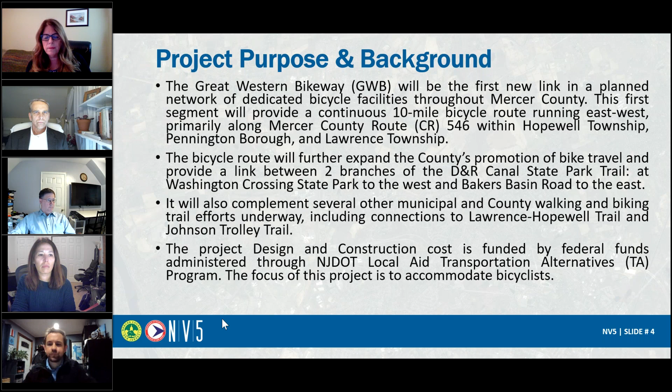Mike, if you go to the next slide. This next slide shows a little bit of what Matt Lawson was talking about. The original GWB project consisted of 3 segments, a total of 14.4 miles. Segment 1 is what we're focusing on now, down the middle, down 546, with a little bit of 631 and 632. So although the current project focuses on segment 1, that's really the main backbone of it.

Segment 2, shown there, is County Route 611, about 2.7 miles, which would connect the GWB along Scotch Road to recently installed bicycle facilities between Upper Ferry Road and Parkway Avenue in Ewing. Segment 3, at the top, is approximately 1.8 miles, and would connect the GWB to downtown Pennington. These segments 2 and 3 are anticipated to be constructed as roads are repaved, new land development occurs along the corridors, and/or more grant funding becomes available.

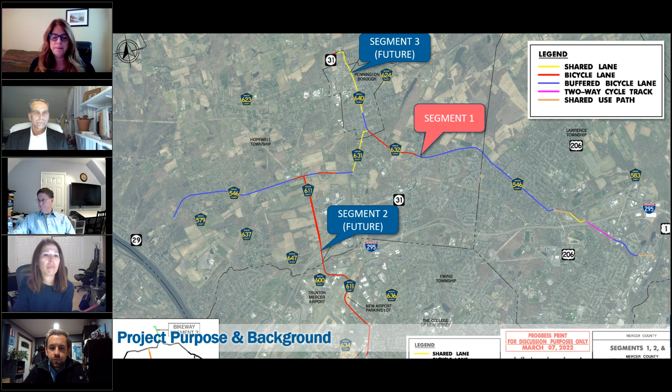So for the project limits, beginning in Hopewell Township, the project limits extend from the western terminus at the entrance of Washington Crossing State Park, along Washington Crossing Pennington Road to Ingleside Avenue. The route continues north along Ingleside Avenue, also known as County Route 631, into Pennington to South Main Street.

Heading southeast along South Main Street, also County Route 640 and County Route 632, it becomes Pennington Road and crosses into Hopewell Township. The route then continues into Pennington Lawrenceville Road. Proceeding east along Pennington Lawrenceville Road into Lawrence Township, the route continues to Mill Road. The route then follows Mill Road and links to Franklin Corner Road. Resuming east along Franklin Corner Road, the route then continues to Bakers Basin Road at US Route 1.

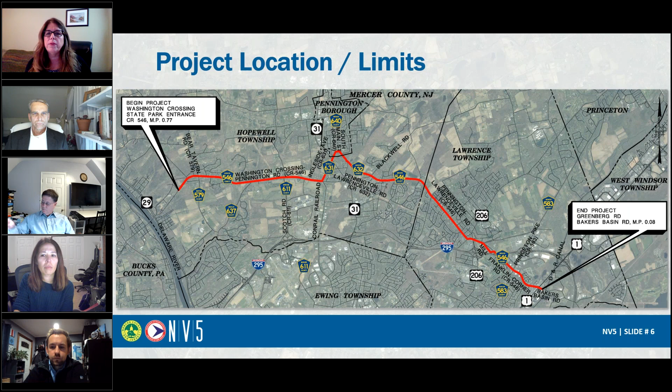Following Bakers Basin Road, the project limits terminate at Greenberg Road, where it will connect with a separate DOT project by the D&R Canal State Park—a replacement of the bridge over the D&R Canal. We're coordinating with DOT on that project to tie into it.

So the project location and limits, in addition to the D&R Canal State Park Trail, other trail links include the Johnson Trolley Trail crossing, Curlis Trail, 5 Mile Run Park Trail, 2 connections of the Lawrence Hopewell Trail, the recently constructed Keefe Road connection, and a future Bristol Myers Squibb connection.

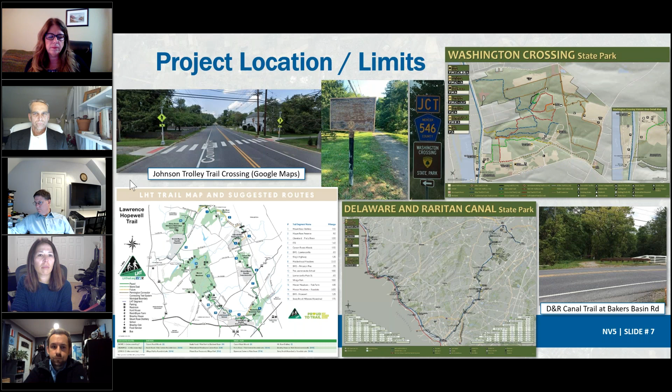So for existing conditions, you could see from these pictures and a little bit what Matt talked about in the beginning: Washington Crossing Road, which is 546, Ingleside Avenue, 631, South Main Street, 640, Pennington Lawrenceville Road, which is 632, County Route 546, and Franklin Corner Road, which is also County Route 546.

They're under county jurisdiction. Mill Road and Bakers Basin Road are under Lawrence Township jurisdiction. The majority of roadways consist of 2-lane sections, 1 lane in each direction, with varying shoulder widths, generally 7 to 8 feet, as Matt mentioned.

The left photo shows a section of Pennington-Lawrenceville Road where it does have these wide shoulders. The segment of Franklin Corner Road between Princeton Pike, which is County Route 583, and US 1 consists of a 2-lane section, 1 in each direction, with a continuous 2-way left median lane, shown on the bottom image on the right. Ingleside Avenue and Mill Road are narrow roads without shoulders. The photo on the right is of Ingleside Avenue, where the lane widths range between 13 and 15 feet.

So what we were trying to do is, within the existing curb-to-curb widths of the roadways, determine which is the best bicycle facility to fit to avoid impacts.

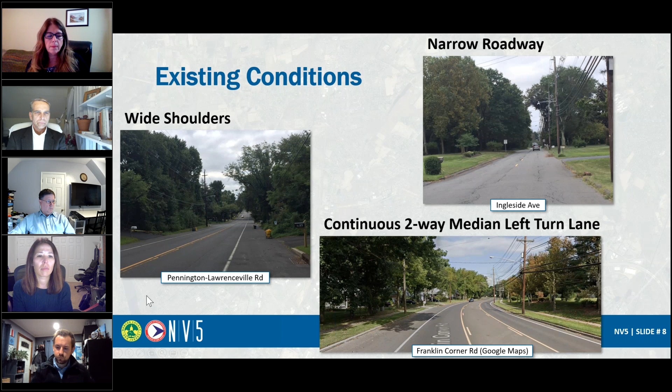So on this screen, you'll see a series of different sections. Most of the proposed improvements will be constructed within the existing roadway, to minimize impacts to existing drainage, utility poles, properties, and environmental impacts.

On-road bicycle lanes are proposed for the majority of the 10-mile bike route between Washington Crossing State Park and the D&R Canal State Park Trail at Bakers Basin Road. In several locations where exclusive bicycle lanes cannot be provided due to lack of available width, the bicycle facility will continue with either shared lanes or an off-road shared use path.

So the project basically consists of 5 types of bicycle facilities shown here: shared lanes, where bicycles and vehicles share a lane with pavement markings and signage; separate bicycle lanes; buffered bicycle lanes where there's a separation between them; 2-way cycle tracks, which is a 2-directional bike facility; and shared use paths, shown on the bottom, which is separate.

In the Princeton area, sometimes they call it a side path, but it's a separate facility from the roadway.

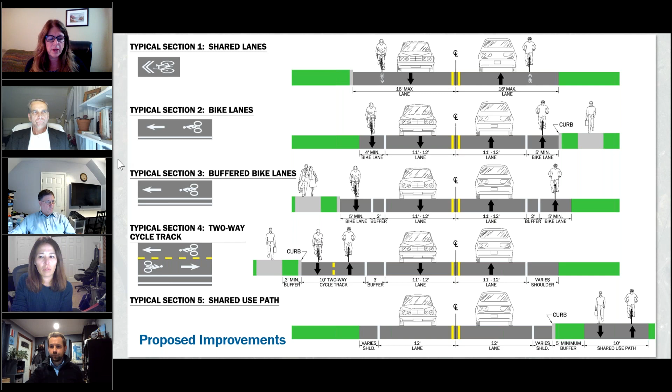So now we'll review each of these treatment types to show you some examples. For bicycle lanes, both conventional and buffered, the images shown here are examples. For our corridor, they will mostly be buffered, where it has that separation. The images follow the guidance of the Manual for Uniform Traffic Control Devices, known as MUTCD, which is like the traffic bible, and NACTO, the National Association of City Transportation Officials.

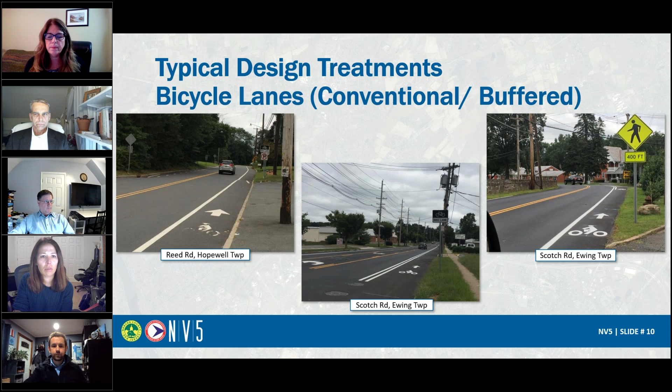You can go to the next treatment, which is shared lanes. This treatment is where the roadway width is narrow and we couldn't fit a separate dedicated bike lane, and where the speed limit is low, 35 miles per hour or less. The image in the center of the screen is the pavement marking, as per the direction of MUTCD,

which is the Manual of Uniform Traffic Control Devices. The other images shown with this marking were where it's been recently installed, on the left in Ingleside Avenue in Pennington Borough, and on the right also in Ingleside Avenue. The proposed bike route will connect to these shared lanes.

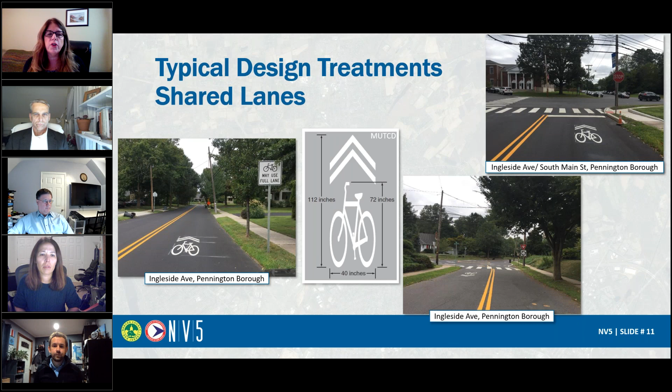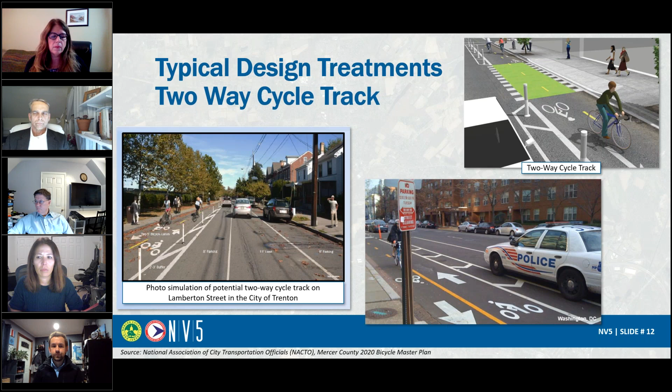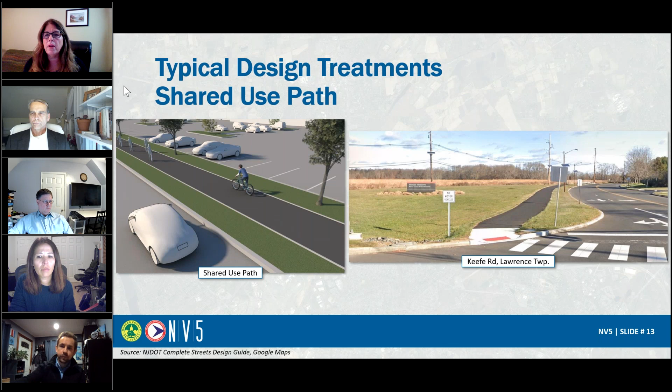And the other treatment is known as the shared use path. Like we said, in the Princeton area it seems like they'll call it a side path. It's also sometimes called off-road. The difference with this facility is that it's meant for bicycles and pedestrians. The shared use path was one installed recently along Keefe Road in Lawrence Township, connecting users to Mercer Meadows and Lawrence Hopewell Trail. This project will link to that connection. So once again, this one is a shared use path, meaning shared with bicycles and pedestrians.

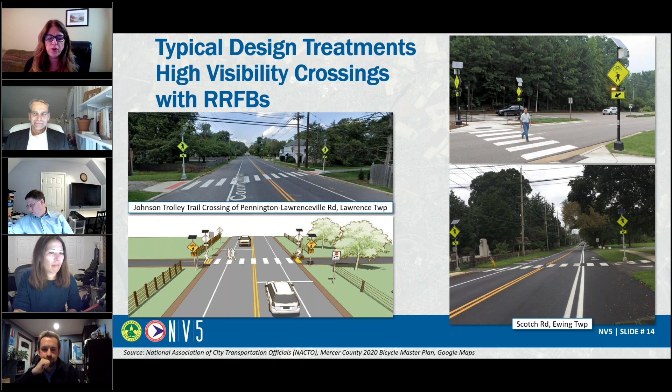And the other design treatment is the RRFBs, or rapid rectangular flashing beacons. The crossings shown are Scotch Road and Johnson Trolley Trail and Pennington Lawrenceville Road, which were recently constructed. The project will link to the Johnson Trolley Trail crossing. There's a lot of tongue twisters in this project. The RRFBs for this project will be at 4 locations where the route must cross the roadway, and we'll show them on future slides in more detail.

So at this time, I'm going to pass it over to our project engineer, Jean Opel, and she will review the progress plans. What we did is, like we said, there's over 10 miles, so we want to show highlights of different areas. So I'll turn it over to Jean at this time.

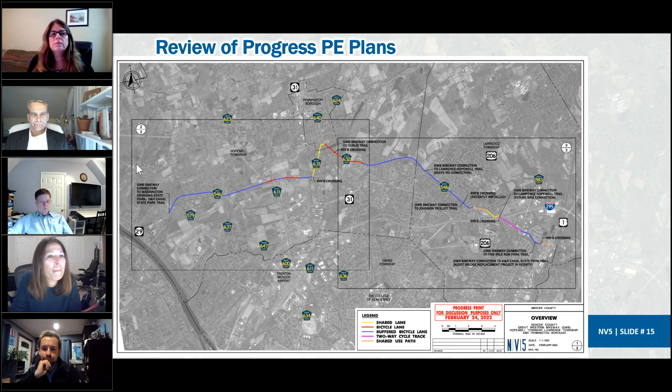So signed and striped buffered bike lanes are generally proposed along each side of Washington Crossing Pennington Road, or County Route 546, between the Washington Crossing State Park entrance and Ingleside Avenue, or County Route 631. There are a few isolated locations where the buffer is dropped due to auxiliary lanes at intersections. A high visibility crossing enhanced with RRFBs is proposed at the Washington Crossing, Pennington Road, Ingleside Avenue, Reed Road intersection.

Shared lane markings are to be installed along each side of Ingleside Avenue between Washington Crossing, Pennington Road, and South Main Street, or County Route 640, in connection with existing recently installed shared lane markings. Signed and striped conventional bike lanes are proposed along each side of Main Street, or Pennington Road, between Ingleside Avenue and Pennington Lawrenceville Road, or County Route 632.

A second high visibility crossing is proposed at the Pennington Road, Pennington Lawrenceville Road intersection. Continuing east, signed and striped conventional bicycle lanes are proposed along each side of Pennington Lawrenceville Road between South Main Street and the vicinity of Blackwell Road, shown on the next plan sheet.

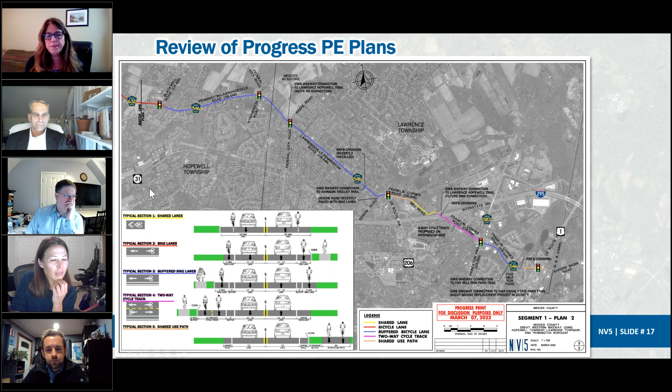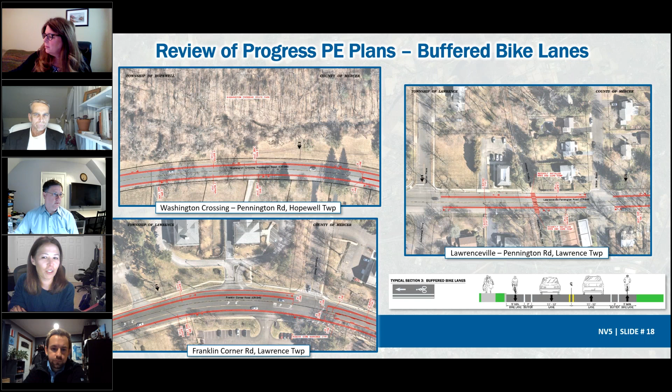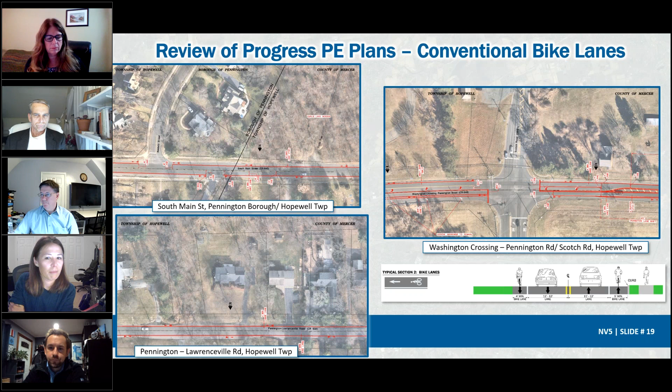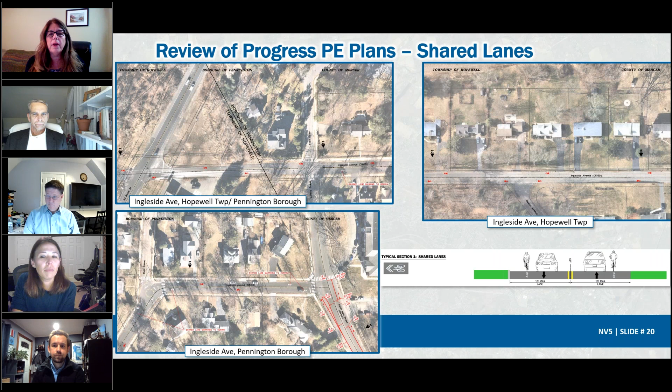So the two-way cycle track - these images are examples of the two-way cycle track proposed along the westbound side of Franklin Corner Road. The top image shows the cycle track on the opposite side of interchange 295 exit ramp. By locating the bicycle route along the westbound side, we were able to avoid conflict with the exit ramp.

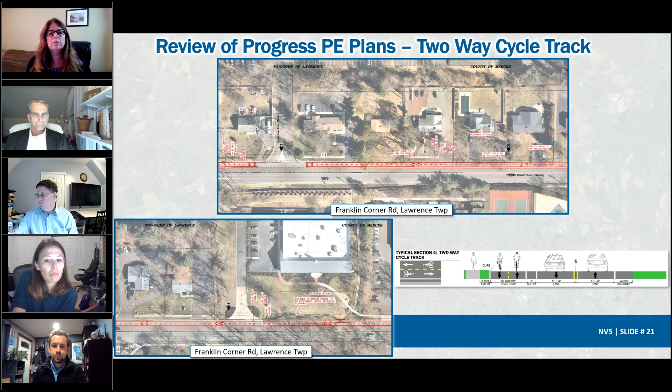The shared use paths - these images are examples of shared use paths within the project. The image to the left shows the existing sidewalk along Franklin Corner Road and the Morris Hall Meadows property, which will be replaced with a shared use path. The image to the right shows the existing sidewalk along Bakers Basin Road between US 1 and Greenberg Road, replaced with a shared use path. The project terminates at this location and will be coordinated with the D&R Canal Bridge Replacement Project.

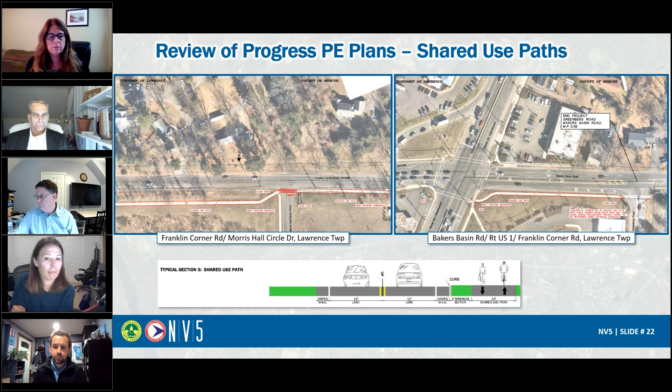So these are the 4 high visibility crossings with RRFBs. The center image is a picture of an RRFB recently installed near Alexander Road over the D&R Canal. The top left image shows the crossing at Pennington Road and Pennington Lawrenceville Road. The lower left image is of the crossing at the future Bristol-Myers Squibb LHT connection at Franklin Corner Road.

The top right image is of the Washington Crossing Pennington Road, Ingleside Avenue, Reed Road intersection. And the lower right image shows the crossing approximately 1,000 feet west of US 1 near Franklin Arms on Franklin Corner Road.

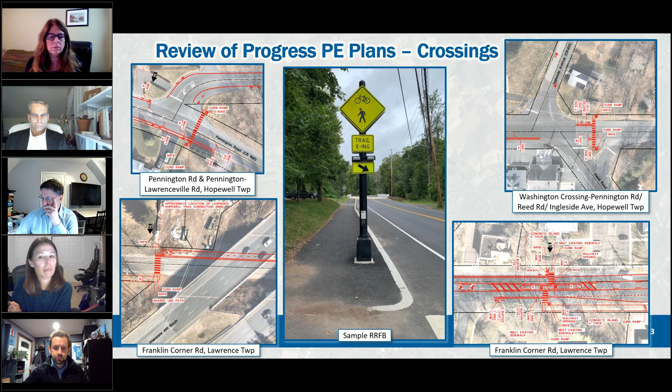Most of the project can be constructed within the existing county right-of-way. There are isolated locations throughout the project that might require small easements to accommodate grading, utility poles, or new sidewalk.

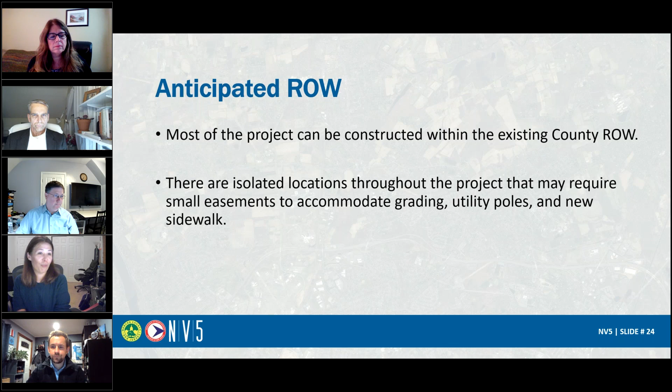I'll now give it back to Denise to discuss the environmental aspects of the project. Thanks, Jean. So we are using federal funds for this project, and part of the NEPA process for federal funds for environmental review, the required environmental document for this project is known as a CED, or Categorical Exclusion Document. It gets prepared by NJDOT, Bureau of Environmental Program Resources, BEPR, and we will coordinate with them. These CED documents address any potential environmental issues - they look at deforestation, whether you have to clear a lot of trees.

They look at cultural resources, ecology, threatened and endangered species, wetlands, air and noise, hazardous materials, public reactions such as this public information center, socioeconomics, and environmental permits. And they do that even if you're just striping a bike lane, it's required. If you're using federal funds, for construction, you have to assess if there's any impacts during construction and because of the constructed facility. So that's a required document.

Other coordination that we'll have is with NJDEP, the Department of Environmental Protection. Anticipated permits include freshwater wetlands permits, flood hazard area permits, and stormwater management. Stormwater management applies where we are doing any widening or have an increase in impervious area, and we have to address how that stormwater will be accommodated.

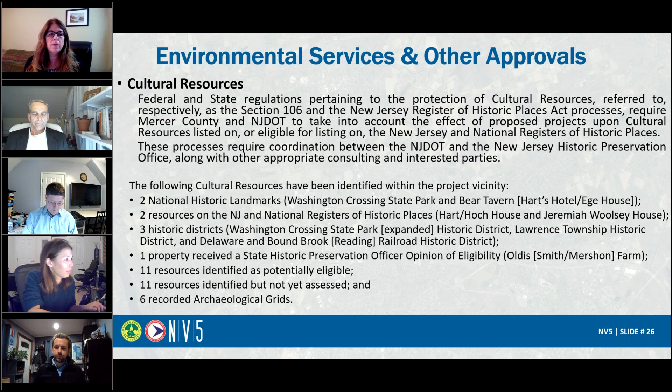As far as next steps, we're going to review comments received from the Public Information Center tonight during the 2-week comment period. We'll work together with the county and complete the preliminary plans if there are any refinements based upon input we receive. Then, once we have a complete footprint of the project, we coordinate with DOT for the environmental document, the CED, the categorical exclusion document. That's required when we make a preliminary engineering submission, and it's required before we go into the next phase, known as final design.

Our anticipated project schedule is to complete this phase, preliminary engineering, in the fall. It'll take a few months because the Bureau of Environmental Program Resources needs time to pull together the CED, with a lot of coordination with many different agencies. We're hoping this can be completed by the fall, with the final design phase occurring next year, and hopefully an anticipated construction start for fall of 2023.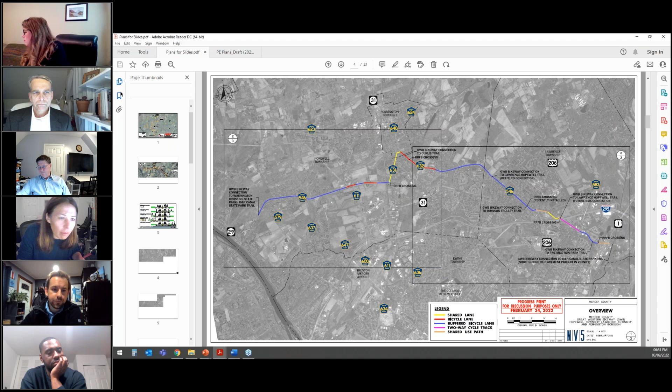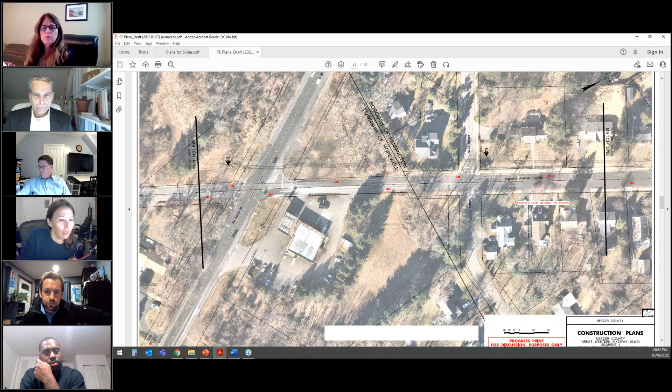Let's pull up that design sketch. Which plan sheet is it on? Maybe it's C22, or page 31, Ingleside and Reed. The team searches through the PDF of drawings, noting it's almost 70 sheets, with a link available on the county site. After some back and forth trying to find the right sheet, they decide to move on to the next question in the meantime, agreeing to come back to it.

The next question: how will the exit ramp from I-295 to Franklin Corner Road be made safe? There's no way to make it safe. That is one of the locations, and using Mill Road in Lawrence Township is another issue.

What I had imagined when I planned the expansion of the 546 Bikeway plan, which did not include anything east of 206, was that the most expensive portion would be between 206 and Franklin Corner Road, where that interchange happens and where the road becomes very narrow. There are no shoulders, there's drainage right next to the roadway, and there are power lines and utility poles right next to the roadway. Lawrence Township came up with the recommendation of using Mill Road and diverting off of Franklin Corner Road.

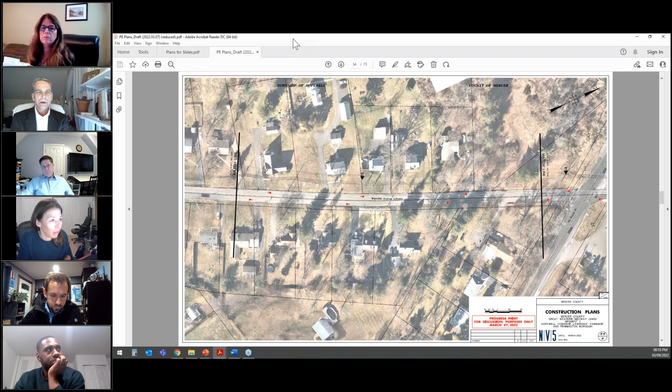Franklin Corner Road is still County Route 546 through that area, and that's why we go next to Morris Hall with a side path, then on Mill Road over to where it comes back out on 546, just west of the crossing of 295, the 295 overpass. It's at that point that we can put in a crossing of 546, and at that specific location Bristol Myers Squibb is expecting to put a trail connection out to County Route 546.

That crossing will afford another opportunity to connect to the LHT, but it also allows us to cross over to the north side of 546 Franklin Corner Road, where we're planning to put in a side path over to Princeton Pike. That side path allows cyclists to travel on the opposite side of the road from that interchange, from the entrance or exit ramp from 295 onto 546. Since we can't do anything with that ramp to make it safe for cyclists to cross, we're taking the path onto the other side of the roadway.

And just to add to that, we did have some coordination meetings with NJDOT subject matter experts to brainstorm and see what other type of improvements. Mike, you have access to the PDF, unless Gene, I don't know if Gene can take control.

I have the PDF for the plan set. Yeah, back on, sorry about that.

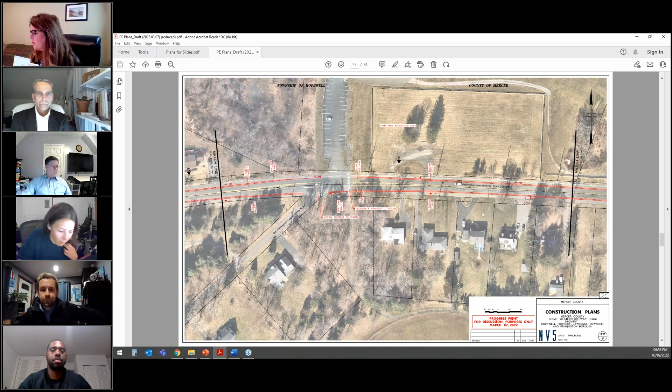So C55 in that area is where Franklin Corner Road crosses over 295, and we have the two-way cycle. Yeah, there, okay great. Why don't we do that one first, Gene?

So these were some of the questions that we had earlier. We were just trying to pull them up. They're very large files, so we appreciate you bearing with us.

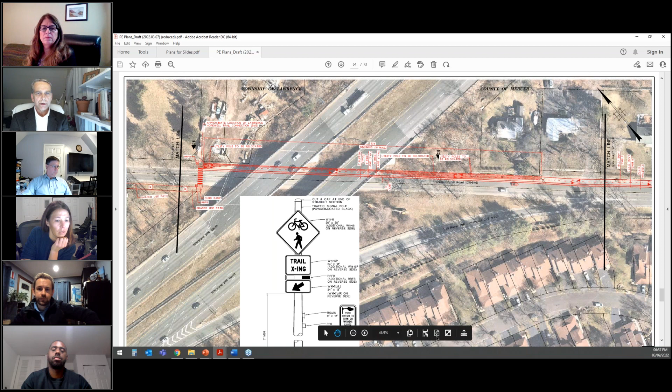So this shows the crossing just west of the crossing of 295, and the previous sheet to the west shows the segment on Mill Road. Mill Road is an existing public street, primarily used as a driveway. Lawrence Township is planning to pave it as part of their annual paving program in the next year or two, and so that will be available not as a public street, but as a multi-purpose path that is off 546, but allows people to make that connection and continue on the bike route.

The next question or comment is: I live at the corner of Ingleside and Route 31 in Hopewell Township. It is one of, if not the most dangerous intersection in the township. While I love this project, I have real concerns about the safety of the intersection and the township stretch of Ingleside. Despite the 25-mile-per-hour speed limit, people use it as a cut through, and it is not unusual to see people tracking 40 to 50 miles an hour on the road. Launching this without an extensive safety campaign would be incredibly dangerous. Our family witnessed, I believe, at least 3 motor vehicle accidents at the corner in February alone, at the corner of Ingleside and 31.

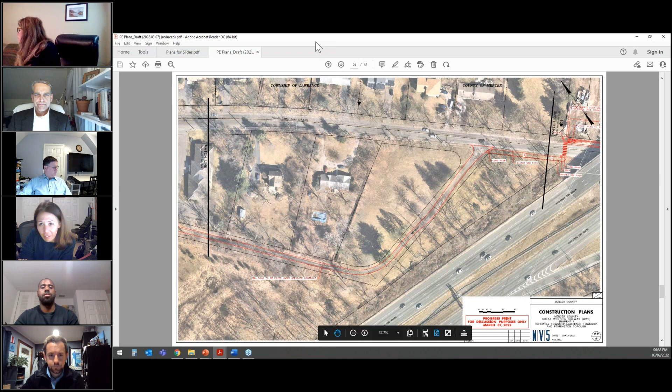The MUTCD recommends, and the NJDOT Complete Streets Design Guide recommends, shared facilities—bicycles sharing the road with motor vehicles—on roads 35 miles an hour or less.

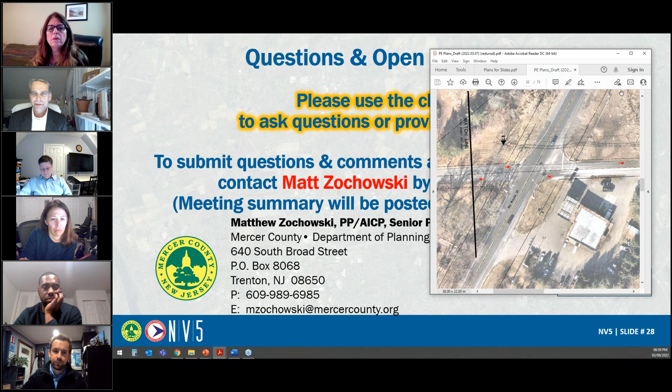Oh, this is another one of those tough locations. So the call-out here is the plan sheet for 31 and Ingleside. And we had talked extensively about alternatives here, and I'm not seeing it. So I was imagining a previous alternative before that conversation with the NJDOT subject matter experts. This would be another location where we would have to bring the entire intersection up to contemporary standards.

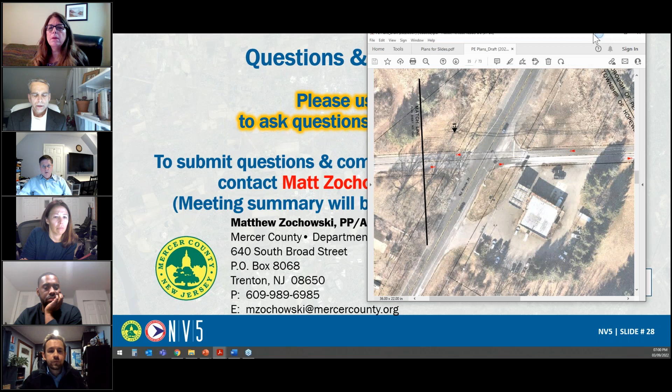Yeah, Mike Keller, as we're going over the plan sheets, if you could park the PowerPoint. So we're sensitive to the dangers of share-the-road.

The speeding is a matter of enforcement on the part of Hopewell Township and Pennington Borough, and there's not a whole lot that we can do about it. One of the things that we would have a lot of difficulty doing is widening Ingleside to put in a bike path or bike lanes. That might raise further objections, or much greater objections, from the property owners from whom we would have to acquire right of way. It would also explode the cost of this project overall. We're trying to stay within the safety guidance of the Federal Highway Administration and the MUTCD. There's limited control that we can have over road users.

Denise, do you want to make any more comments about this intersection, this crossing? Well, I think the stakeholders' concern was that they feel it's already a dangerous intersection, and now we're going to be introducing bikes. Bikes are already there. To make it safer by pavement markings, signing and striping where we could keep a separate facility, we are doing that. But as Matt said, it's difficult without impacts to adjacent properties, utilities, drainage, environmental. So that's why we're not just widening everywhere to keep in that facility. Maybe it could be something as part of another planned project.

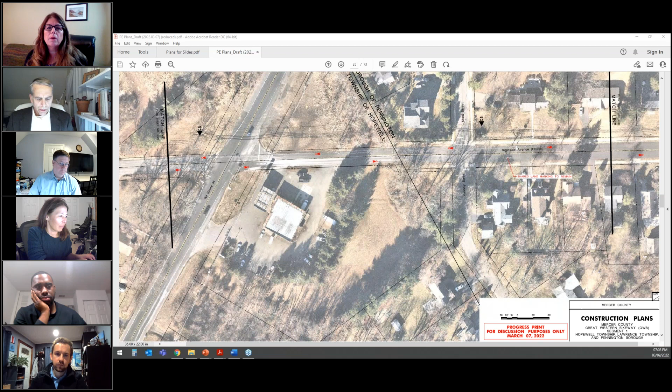Will the speed limit on Franklin Corner Road be reduced? That's a good question. The bicycle facilities we're implementing here, in compliance with the NJDOT Complete Streets Design Guide and the MUTCD, are in relation to the posted speeds on those roads. Mercer County is considering a variety of different ways to control speeds. The road diet on the four-lane section of Franklin Corner Road is one way to do that, basically to provide platooning, where the slowest vehicle in the platoon will meter traffic.

Basically we're trying to put in bicycle facilities that are safe according to the limits of the roadway width we can achieve, and where we can lower speed limits, given the methods outlined in the Manual on Uniform Traffic Control Devices, we will do so. But those are technical questions that have to do with the design of the roadway, the design speed of the roadway, the observed speed of traffic, and a variety of other factors. We cannot magically change the speed limit to make it what we wish. We have to comply with the law.

Joe, would you add anything to that or correct any misstatement I may have made? No, everything you said was correct. The only thing I'll add is that in order to reevaluate the speed limit, we really want to see if there are any changes to the road. So that's something the county will most likely do once this project is constructed and in place, and we've made the changes. Hopefully the visual changes to the roads, the signs, the striping, the narrowing, will slow speeds down enough that when the county reevaluates it, they can consider adjusting the speed limit in accordance with the MUTCD.

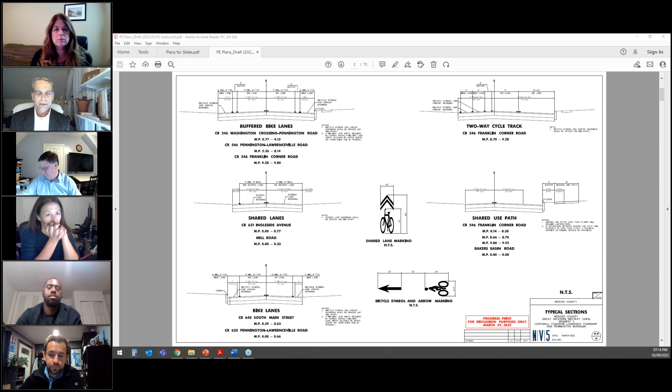That's a great question. I think I will present that to our highway division and see if they can send a street sweeper out there. The NJPDES, the New Jersey Pollutant Discharge Elimination System, requires us to sweep the roadway. I believe the schedule is once every 3 months for curbed roads under 35 miles per hour, and most of this route is not that. But I think we could consider sending our sweepers out there, particularly if it's marked as a bicycle facility. That's a question I will bring to our highway department and see if we can get that cleared up.

Next question: have any of the proposed segments gotten negative public or municipal pushback?

Not to date. In fact, Lawrence Township has been quite eager to see this project and supportive of it, as evidenced in the inclusion of Mill Road to allow us not to widen 546 through that segment. There is further interest in the Mill Road and Morris Hall segment because of the multiple connections to the Lawrence Hopewell Trail and the Johnson Trolley Trail afforded by the bike route. Hopewell Township is also very positive. Pennington Borough has been excited about the improvements we've made to Ingleside, adding the shared road markings. So no, we have not had pushback from municipalities.

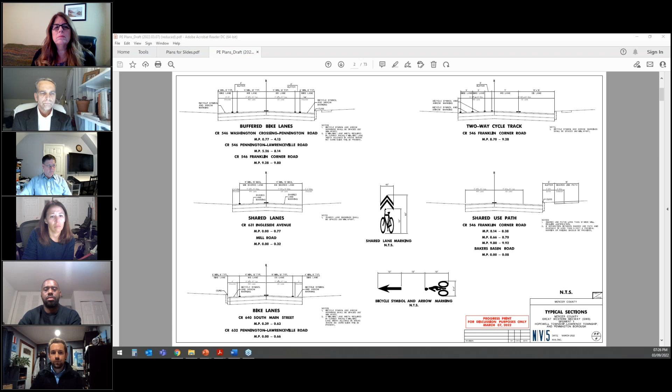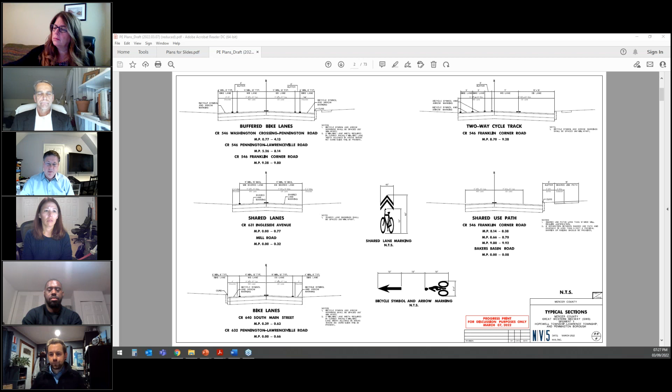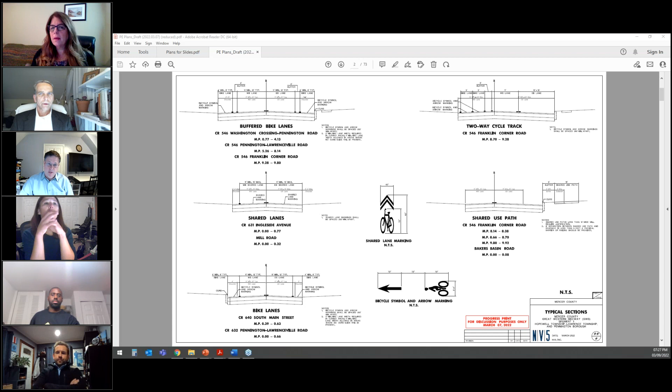Joe, it's a DOT signal, but can you address the crossing time? The signal should already be timed so that if a pedestrian pushes the button, you have enough time to walk across the intersection. As we proceed into final design, we'll work with the state to make sure that requirement is met. Route 31 was updated relatively recently, so pedestrian timing should meet current standards, which use 3.5 feet per second—a fairly slow walking speed. So if you push the button and step off when the walk signal goes on, you'll have enough time to walk across at a slow pace. That should be enough to get someone with a bicycle across as well, but we'll verify that when we get into final design.

The person also commented, congrats to this group. My son and I biked across the US from Oregon to Virginia, August through October, 4,280 miles essentially all on roads and streets without bike lanes. So bravo to this group. We also live on Pennington Lawrenceville Road.

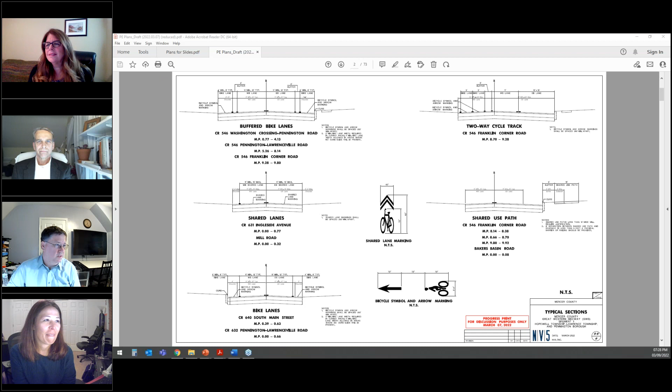Next comment: sorry I've joined late, will the slides be available for viewing on the webpage? Yes, the presentation is being recorded. In addition, the slides will be on the webpage along with a progress set of the plan sheets. What you see right now is just one of the plan sheets, but there are over 70 plan sheets, so there'll be a link to those as well. They're in progress print phase at this time. Similar to a few other comments we got, apologies for getting on late.

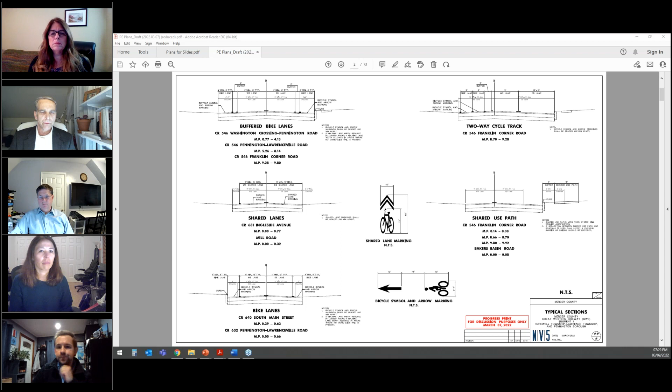Next one: any connections envisioned to Hopewell Borough? That would probably be through the Lawrence Hopewell Trail. There are conversations happening between the LHT board and Hopewell Borough to try to create a multi-purpose path of similar construction to the other segments of the LHT, providing an off-road alternative. It's tough because it's through private property, and Carter Road, which would be a logical connection, goes through environmentally sensitive areas and doesn't have very wide shoulders. So a road connection to Hopewell Borough would be very tough to do, and that's not anticipated as part of this project.

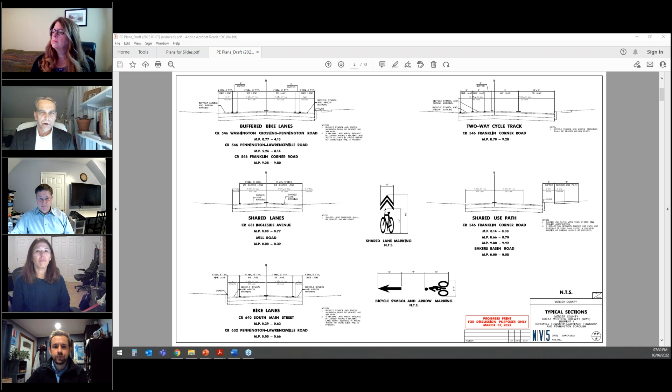Next question: this is a great concept, but a problem took place on Reed Road in Hopewell Township at Route 546. This was installed, but it didn't seem that the property owners were consulted. When the bikeway was installed, visitors of these property owners could no longer park on the road. Are you going to reevaluate this bikeway, and will this problem be taken into consideration in the future?

If this is in reference to the bicycle lanes on Reed Road, that is a Hopewell Township facility, and the county did not have any role or responsibility in the construction or painting of those bike lanes. We are anticipating making changes to the intersection of Reed Road, Ingleside, with County Route 546. It's complicated by the railroad overpass just to the west, but we anticipate significant improvements there that will make the visibility of that crossing safer and the overall condition safer at that intersection. Also, for this project we sent out over 2,000 invitations, so anyone along the corridor, even if something's just being striped, received an invitation. In the next phase, if parking is impacted, there has to be an ordinance update, so those procedures would be followed.

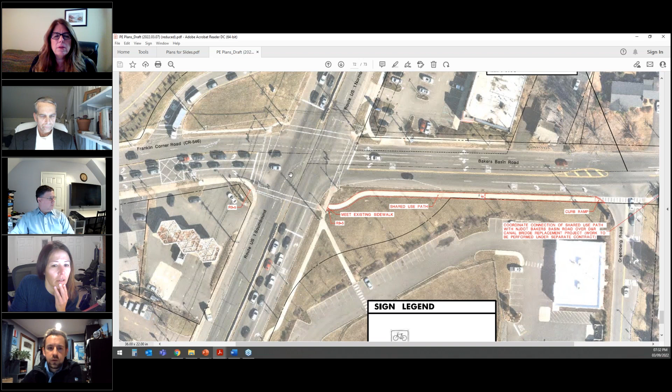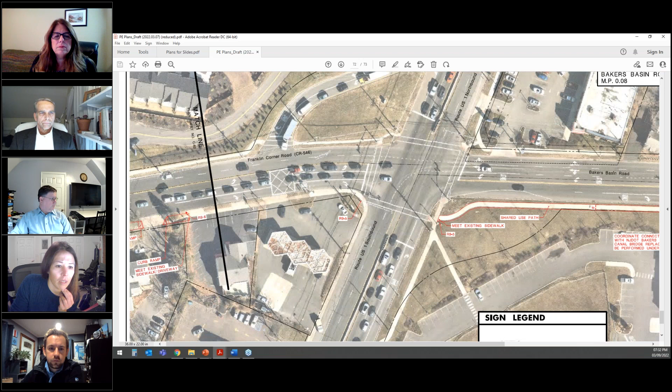Jean, want to talk about the treatment here? We wouldn't be directing cyclists onto a sidewalk. I think the question was about 206. Oh sorry, I thought they said Route 1. Mike, could you repeat the Route question? As you approach Route 1 on Franklin Corner Road, are you proposing cyclists go on the sidewalks? Yeah, I guess you can even go back a sheet.

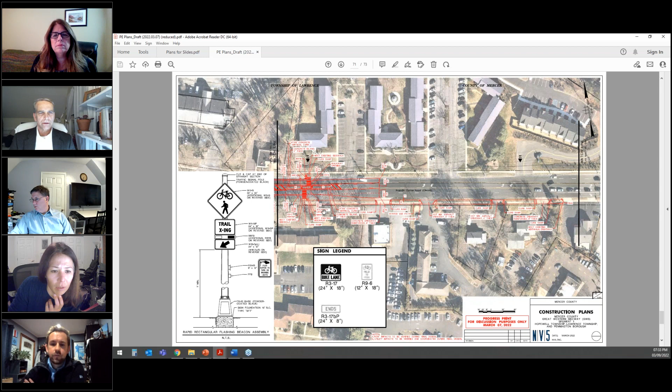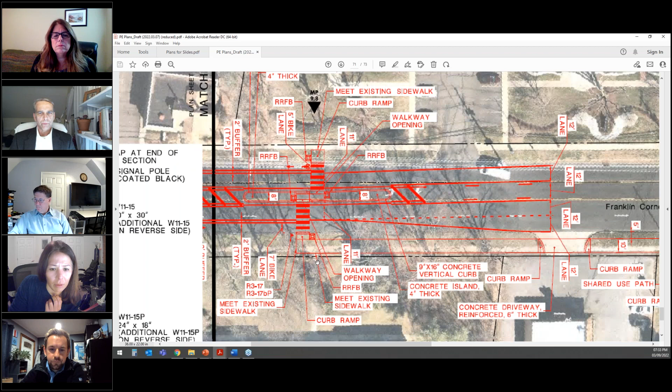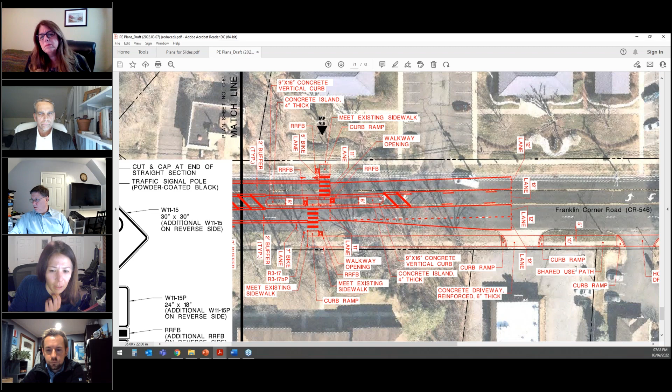We are proposing a shared use path approaching Route 1. So bicycle lanes to the west of the match line here would have a pedestrian crossing with a pedestrian refuge island offset, and then minor widening of the sidewalk to 10 feet for a 10-foot shared use path. Then they would be directed to dismount at the end of the shared use path as it approaches Route 1. So when the stakeholder said sidewalk, it's actually a shared use path for cyclists and pedestrians.

Next question: why are the buffered bike lanes not going to have flexible bollards or a hard curb? If there's room for buffering, why wouldn't a hard separation be possible? Given the speeds of traffic involved, a paint-only solution may provide a false sense of security at best.

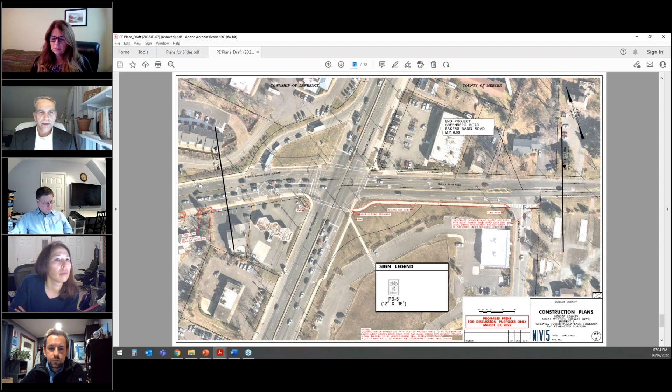For Mercer County, this is a maintenance question. We have to plow snow, we have to sweep the streets, and for a facility of this length, and all our facilities, buying smaller equipment and taking that equipment on a narrower roadway is a challenge from both a maintenance perspective and a capital investment perspective. We considered that in developing guidance in the Mercer County Bicycle Master Plan, and in consultation with NJDOT about acceptable standards relative to their Complete Streets Design Guide, a painted buffer is sufficient. That allows us to maintain the road at a reasonable cost. The buffer proposed is a 2-foot buffer.

Next comment: safety should be taken as first priority, even if the project needs to be smaller. The project has gotten smaller because we have to create a safe facility.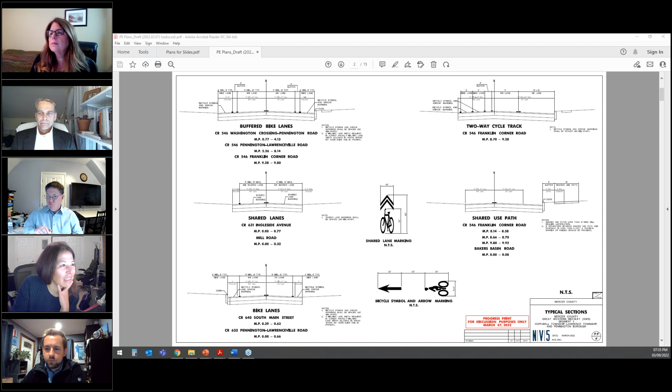And if anyone can't figure that out, Mike, if you put up that last slide, or the earlier slide with the correct one - oh, he changed it already. Yeah.

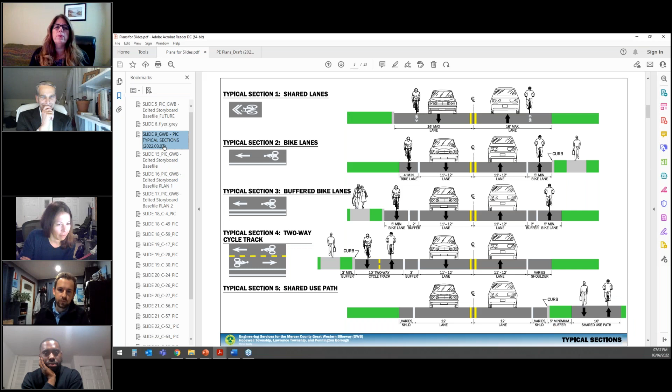The next one up: the only difference between a buffered bike path and a non-buffered bike path is one stripe versus two stripes. The buffer has a separation of 2 feet - if you go back to that graphic, you can see the separation. The buffered bike lane will have additional separation, so that's more desirable where we could fit it. Where it's tighter, we have just the conventional bike lane, and where it's really tight, we have shared lanes. The striping is different: the regular bike lane is a 4-inch line, the buffered bike lane is a 2-foot space with two 8-inch lines, so it does create a bigger separation.

Thanks. And then what we didn't want is the facility to change abruptly. So we had to look at how the facility best fits the existing land use without significant impacts, and without abruptly changing it as you're riding along the corridor.

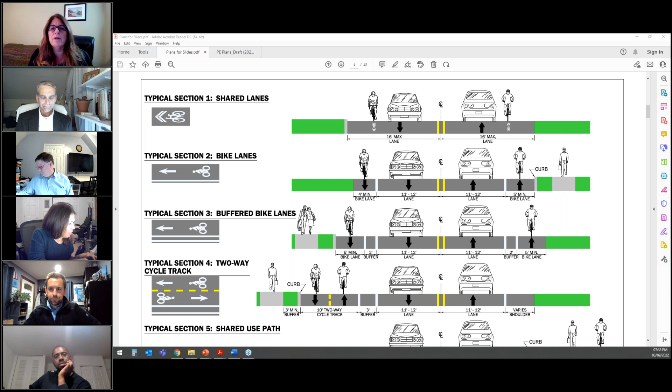I believe we covered this comment several times in the past: will there be any speed limit reductions? We addressed that at some length earlier in the call, and I think it would be best to recover that from the recording or from the notes that will follow with the account of this meeting. We are considering speed limit changes - we have to do that within the confines and requirements of the Manual on Uniform Traffic Control Devices, which requires speed studies. We're hoping that changes to the geometry of the roadway, the striping, and the presence of bicycles will encourage drivers to drive at more moderate speeds.

The next question up: given the 295 exit on Franklin Corner Road, with multiple office complexes on Franklin Corner Road, how can a two-way bicycle path safely accommodate right turns on westbound Franklin Corner Road, since drivers are routinely only looking towards their left at oncoming traffic when making right-hand turns?

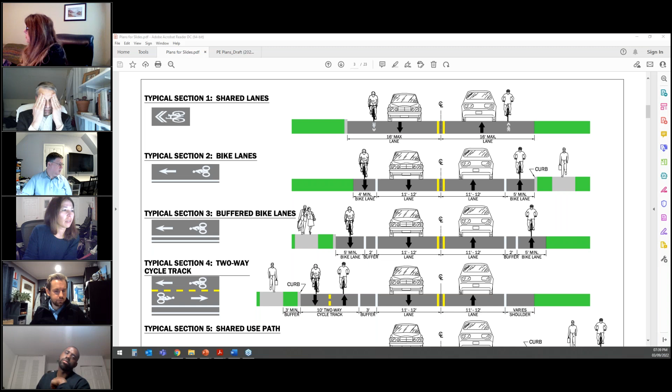Denise or Joe - so the cycle track is on the left side of the roadway. It's on sheet C55, I think. You can go to page... Oh, Kyler, go to 64. Yeah, there you go.

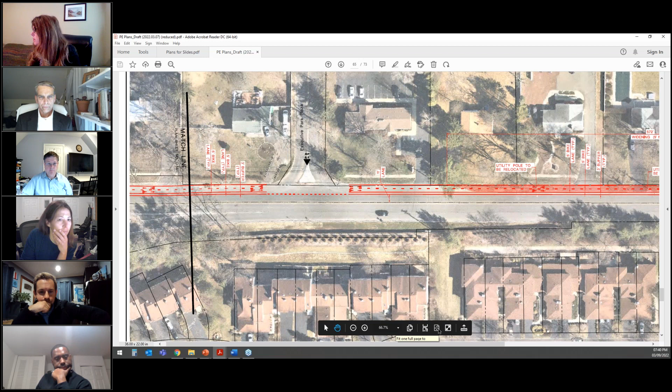Unless they're part of the cycle track - so their question is, in areas where there's driveways in the vicinity of a two-way cycle track, is that what the question is? And about right-hand turns - yeah, I mean, there'll be signage, there's going to be pavement markings and signage, so as people are exiting, they would be expected to be looking for traffic, just like before.

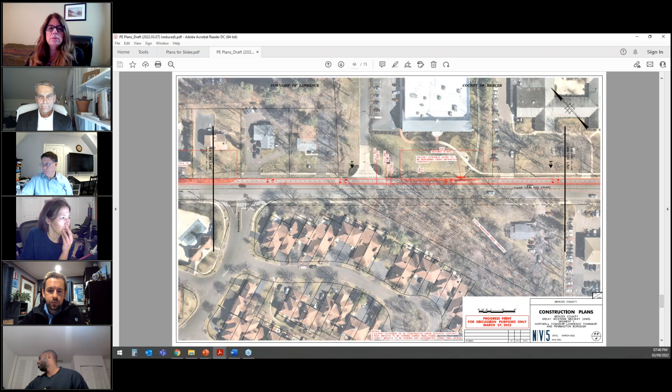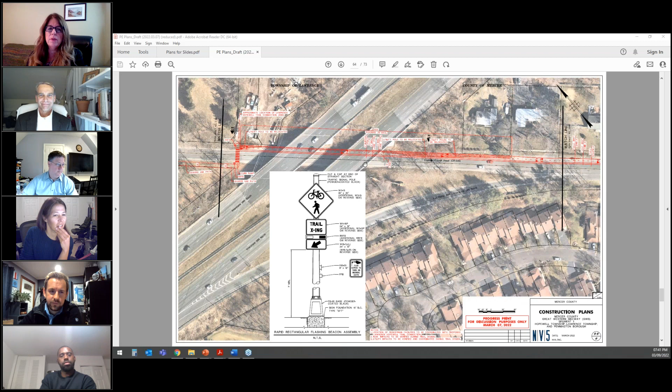Seems like the next question is also related to this area: need additional signage at the exit ramp on Franklin Corner Road to prohibit U-turns northbound - have seen this occur on multiple occasions. So that's just driver behavior where they're making a U-turn there. You wonder if that's something with signage - if they're making that U-turn, is it for some type of convenience, or they didn't realize where they were going? An unsafe convenience. The next question is: are bike lanes granted special protections for cyclists in the motor vehicle codes?

To the extent that a double line for a buffered bicycle lane delineates an alternative travel lane, there are protections afforded to cyclists. By signing and delineating, we are hoping to create a safer condition. By restricting parking, we're hoping to create a safer condition.

Driving on the shoulder is illegal in New Jersey. It's considered a breakdown lane or a safety lane. So if you are traveling on the shoulder or in a formal bike lane in New Jersey, you're not in a travel path for motor vehicles. Yes, if a car is driving in a shoulder when it shouldn't be, or in a bike lane, if an officer catches them, they'll get a ticket. They shouldn't be in the bike lanes. Signing it and striping it, making it more obvious that that's the purpose, should hope to curb any of those issues more, to make it more obvious that a vehicle shouldn't be there.

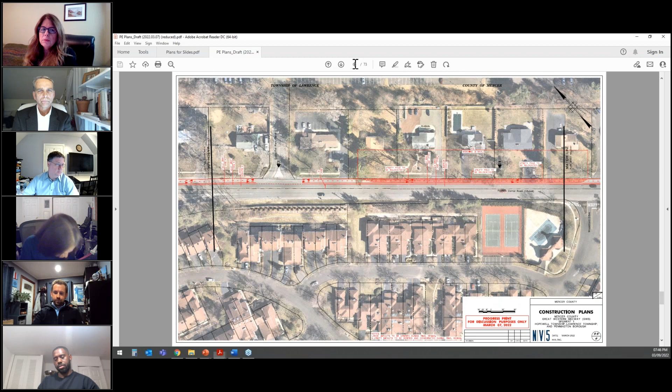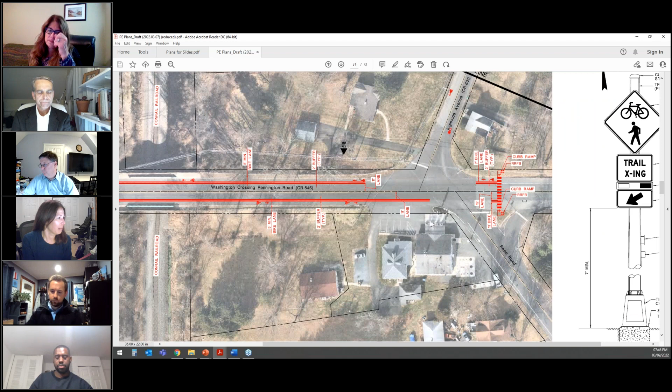And I think also on Ingleside and Reed, that was the offset intersection where we looked at a number of alternatives. Mike, that's at C22, page 31 -- yeah, we have two different sets, sorry about that. So on this side of Ingleside, we looked at a number of different configurations. The intersection is obviously constrained with the mini mart there.

The next question: Franklin Corner Road floods very badly between Route 1 and Route 206, especially east of Princeton Pike. That's an important comment, because we would look at that and make sure we're not worsening the condition, but what would be needed to correct that or mitigate any issues. Yeah, I was not aware of that flooding problem on Franklin Corner Road. That's a drainage issue for, I believe, a branch of Shabakunk Creek.

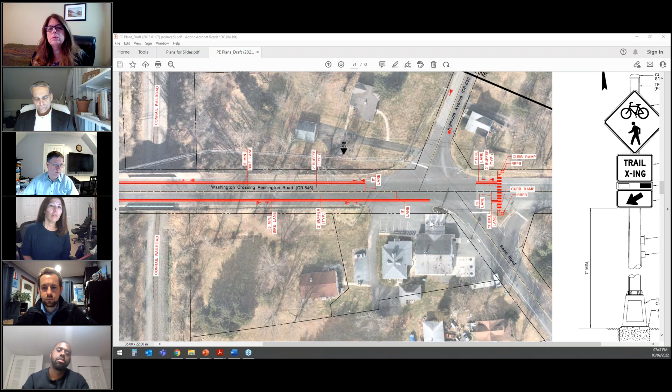The next comment is related to Ingleside and Route 31. How does the situation at Ingleside and 31 abide with the consideration of design safe enough for a 5-year-old? At this point, it does not.

Next comment: for all those who might consider intermodal travel, such as taking one's bike on New Jersey Transit bus to and from the bikeway, might your maps indicate where the nearest New Jersey Transit bus stops are close to the bikeway? I think we could potentially do that. There are bus routes on Pennington Road and on US 206, US 1. I think figuring out where to get off the bus is more of a problem than figuring out where to get on the bus. That would be more of a problem for mapping and route planning than signage on the roadway.

Let's see, the next comment up - it's not a question, but a general comment. It says: kudos on such a comprehensive plan, that is a great leap forward for the cycling citizenry. Thank you.